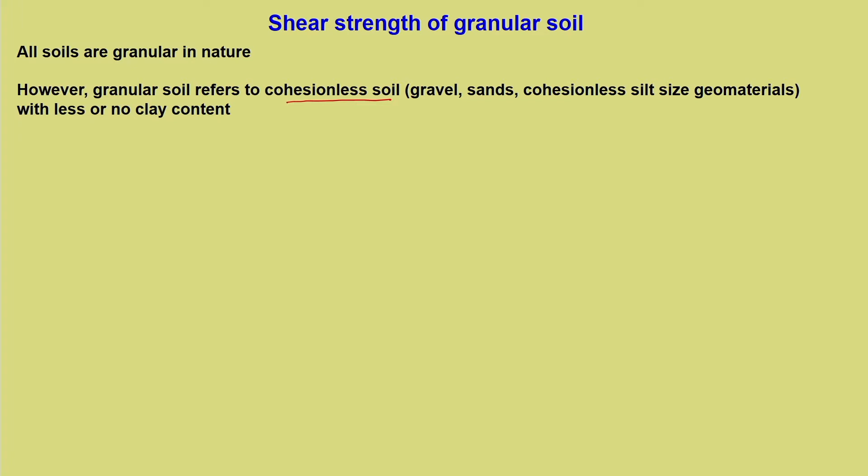This will include gravel, sands or cohesionless silt size geomaterials, because this will include materials like fly ash, which are essentially silt size, and hence can be considered as geomaterials with less or no clay content. So here, when we say granular soil, it essentially refers to cohesionless soil.

It does not possess true cohesion, meaning the absence of natural cementation. But some granular soils like sand can exhibit what is known as apparent cohesion, which is condition specific, depending upon the water content or the degree of saturation of that particular sand.

You might have noticed that it is fairly comfortable walking on beaches which are partially wet. Why is this so? This is mainly because of the capillary action or the negative pore water pressure, which we call soil suction, present in partially saturated sands. Hence, it imparts more strength and you are able to walk comfortably on beaches.

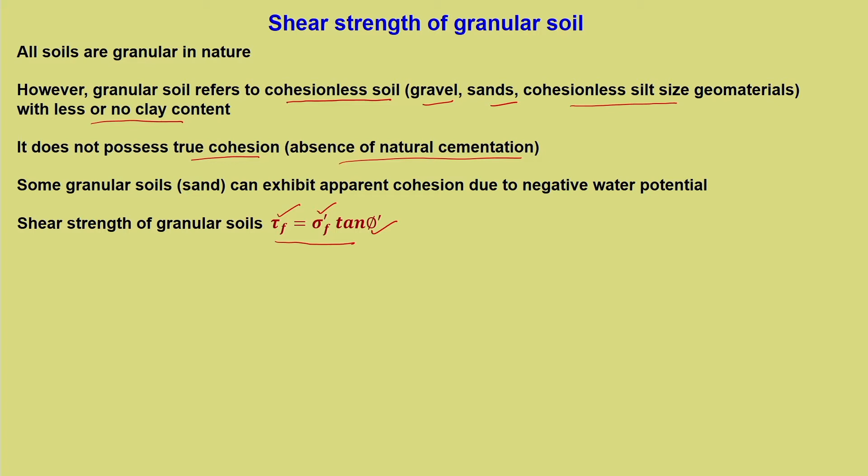Phi dash is mostly determined by either direct shear test or drained triaxial test, because the permeability of granular soil is fairly high.

The initial state of the granular soil, whether loose, medium or dense, affects the shear strength. Now, what is this initial state? It depends upon the initial unit weight or packing or compaction state, and is generally defined by the term relative density, which all of you know.

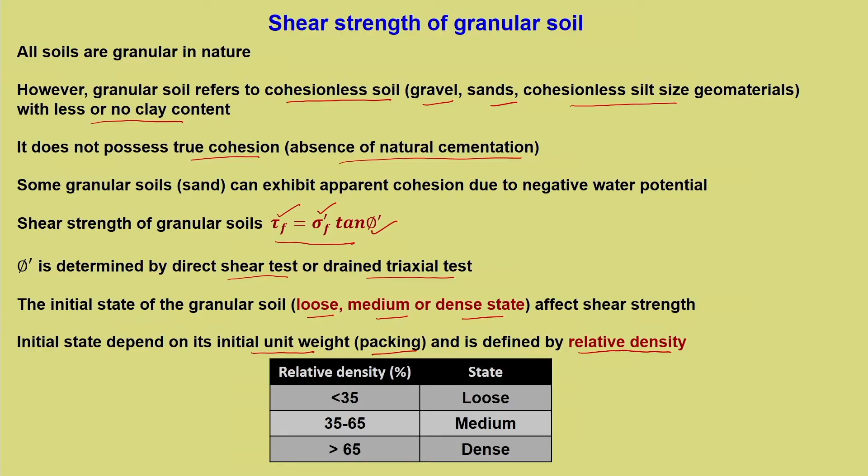As a guideline, a relative density less than 35% is considered loose, 35 to 65% is medium, and greater than 65% is considered dense. So we are basically discussing three states of the granular soil, defined in terms of loose, medium and dense. This relative density takes care of the kind of initial packing of the granular materials.

Now we will see the typical stress strain response of sand, a granular material, from a typical direct shear test, wherein the x axis is represented by lateral shear displacement and the y axis is given by nominal shear stress tau. Now, we know in direct shear test it is very difficult to quantify the strain and the true stresses acting on the failure plane, or on a given plane.

The reason is the area of direct shear keeps changing during the test, because there is a horizontal movement of the upper box. So it is very difficult to state the true stresses acting, hence the term nominal shear stress tau. And instead of strain, we express this in terms of lateral shear displacement, or relative displacement.

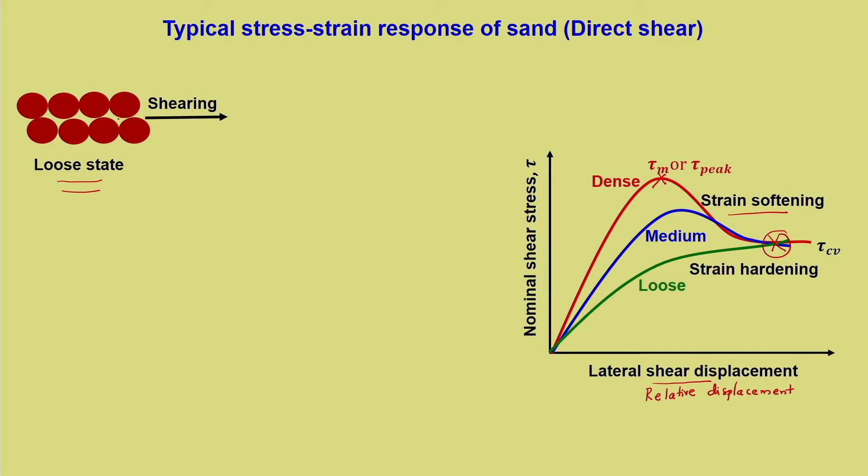Now, this is what a loose state represents. Soil particles are loose, and when this loose state is subjected to shearing, that is horizontal movement, particles can move horizontally, and when it moves horizontally in this direction, the particles move downwards, as you can see by the arrow. All these particles go and fill into the voids because it is a loose state, and hence it moves downwards. This is a very important aspect which we need to understand. When a loose state is sheared, particles move horizontally and downwards, and hence it undergoes compression during shearing. This is an important point which we need to keep in mind. A loose state, when sheared, undergoes compression. This is a very important observation.

In the case of the dense state, particles are already in these voids, so there is a good interlocking of materials. Now, let us say that this dense state is sheared. Shearing means it has to move horizontally. What is the possibility of such a movement? If it has to move horizontally, it has to undergo some movement. So the dense state of granular soil is sheared, and shearing is restrained by interlocking because it is already occupying the spaces, it is densely packed. So there is good interlocking. Now, during shearing, if it has to move horizontally, then it has to move in the upward direction. The particles have to move upward. So this is different from the loose soil.

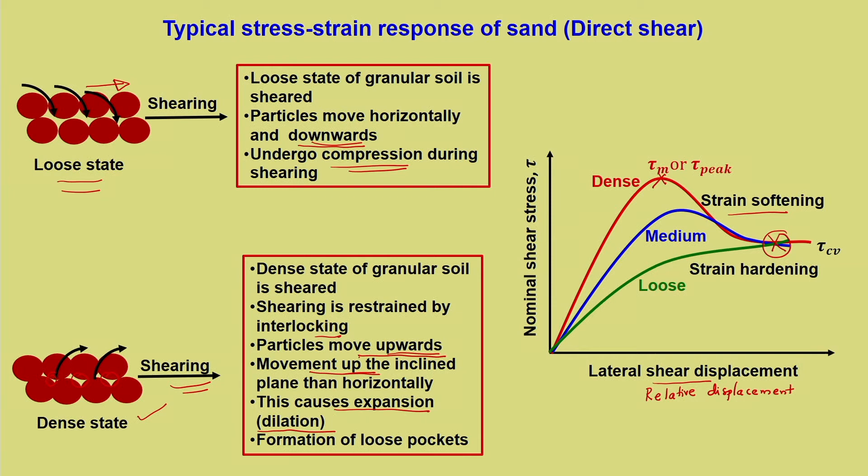So movement is up the inclined plane rather than horizontally. If it has to make any sort of horizontal movement, the movement of the particle is more like moving up an inclined plane, so it has to do additional work. Now this causes expansion, or what is known as dilation. Please remember this carefully: when a dense state of soil is sheared, to execute shear it has to expand, or dilate, and during dilation there are formations of loose pockets, because a densely packed material, when it expands, leads to the formation of loose pockets. So this is the difference in behavior when a loose and dense state of the material is sheared.

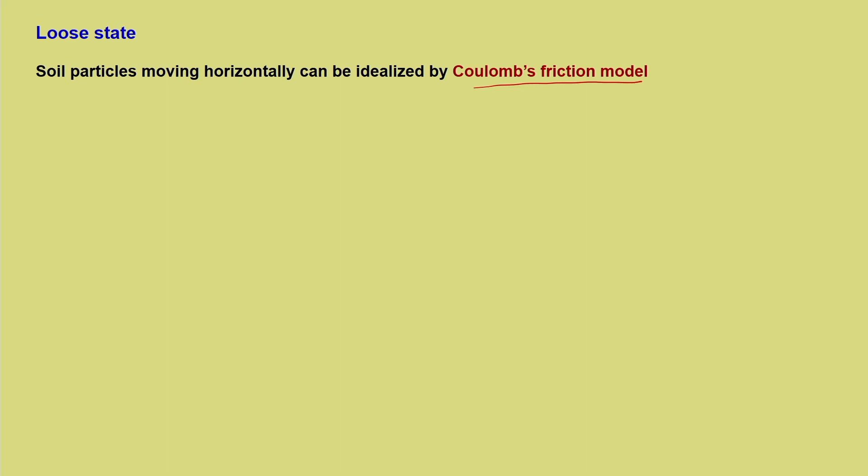Now let us see a loose state in detail. Soil particles moving horizontally can be idealized easily by Coulomb's friction model, as we have learnt, because here it is a loose state, there is an intergranular contact where tau f and sigma dash f are acting. This is the predefined failure plane along which it acts. We know Coulomb's friction model is applicable only when there is a failure plane attached to it. So we can easily write tau f is equal to sigma dash f tan phi dash, no confusion in that.

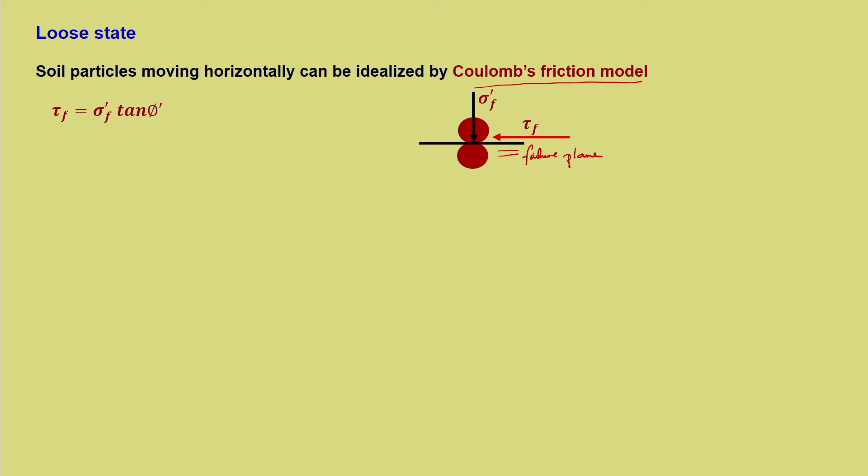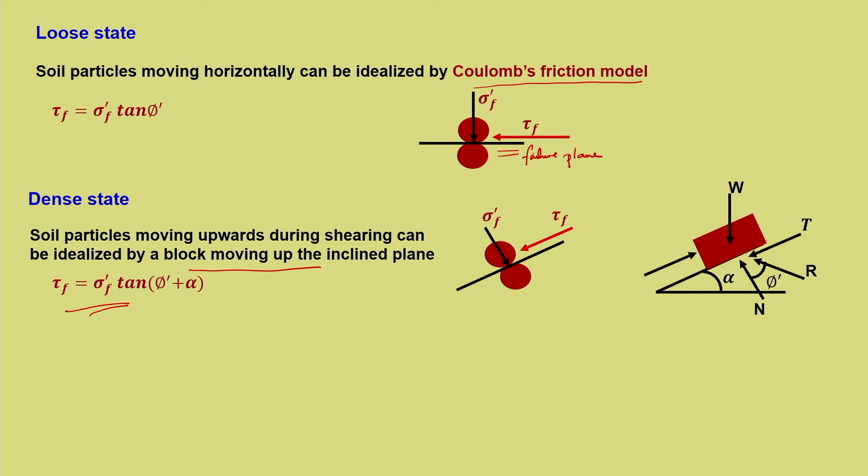Now this is a very prominent friction problem that we have learned, and we can conveniently write tau f is equal to sigma dash f tan of phi dash plus alpha, because it is movement up the inclined plane. Now if it is down the inclined plane, this will be minus. In soils, both will be there; there can be upward and downward movements for particles, but generally in the case of dense soil, for explaining the shear behavior, we normally refer to dilation or expansion. The expansion or dilation in the dense state increases the friction angle component, from phi dash to phi dash plus alpha. This additional component alpha is called the dilation angle, very important.

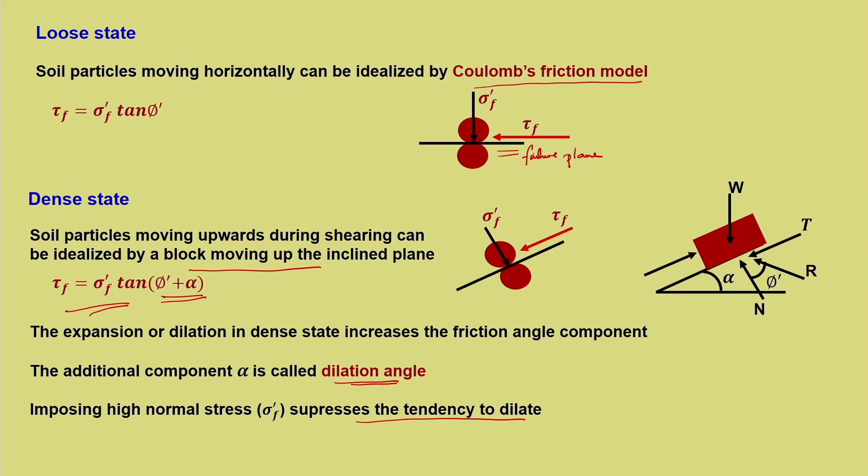Now, imposing high normal stress, if the normal stress is more, this particle will not be able to traverse in the upward direction. You are restricting movement from the upward. There is a confinement which will not allow particles to move upwards freely, meaning the amount of dilation is a function of the normal stress. Here, normal stress is more like a confining stress from above. So imposing high normal stress suppresses the tendency to dilate, because of which the dilation angle decreases.

Now we will see this again. There are some facts: dense and medium compacted granular soil exhibit peak shear strength specifically at low confining stress, because the dilation has to happen. Then only the dilative behavior, expansion followed by peak behavior, is going to happen. So this peak marked here is a function of this dilation behavior.

So peak behavior occurs at low strain or relative displacement due to particle interlocking and dilation, and it is mostly a stiff response, meaning particles are tightly held. So it is a stiff material. Now the peak happens at a low strain.

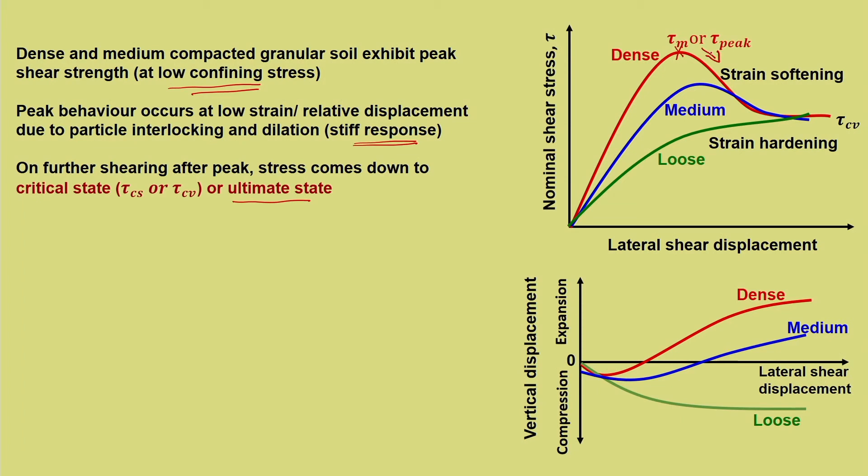So it keeps on increasing, reaches a peak, but this peak behavior is exhibited at relatively lower strain, not at higher strain, or it is expressed in terms of relative displacement, and this happens because of dilation or particle interlocking. On further shearing after the peak, stress comes down to critical state, tau Cs or tau Cv, also known as the ultimate state. We have already told this particular movement downwards—not movement, the stress comes down.

So this post-peak reduction is called strain softening behavior. Now critical state, constant shear strength, occurs at large strain, generally 10 to 20% relative displacement. This is defined differently in different codes, but generally 10 to 20% strain level, you can expect critical shear strength.

Loose state does not exhibit peak and directly approaches tau Cv, as can be seen here. The progressive increase in stress after yielding, post yielding, is called strain hardening behavior, which is denoted here.

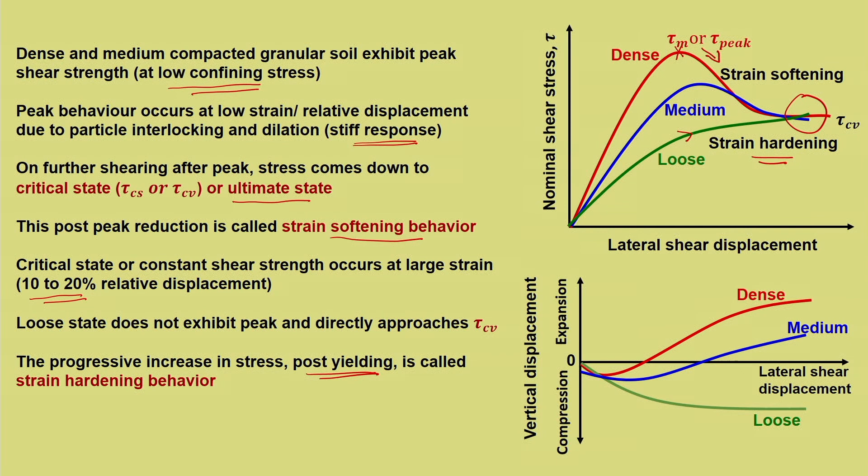Now that is about the stress-strain behavior we have discussed. Let us see what happens to the volume, because we do not generally discuss undrained or no-volume condition. For granular soil, there will be volume change, and how it happens for dense and loose state we will see. The volume of dense sand decreases initially and then dilates.

So here on the y-axis it is vertical displacement, and on the x-axis it is lateral shear displacement or relative displacement. For dense soil, we can see an initial decrement in vertical displacement, which is nothing but compression. Below is compression, no volume change, and expansion. For dense soil, there is initial compression followed by an increase in volume, which we call dilation. By the time it dilates, it reaches the peak behavior.

Volume reaches constant at high strain or relative displacement. By the time it reaches the critical state, the volume change also remains constant—there is no more volume change. It reaches a constant volume at high strain condition, maybe close to critical state.

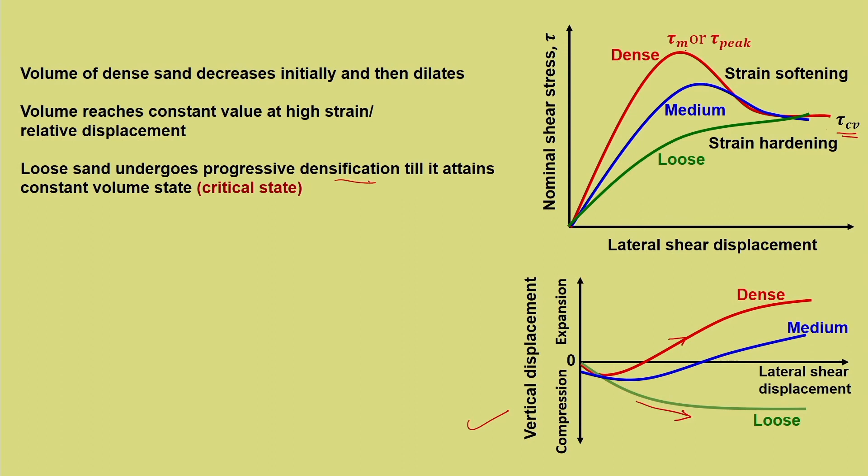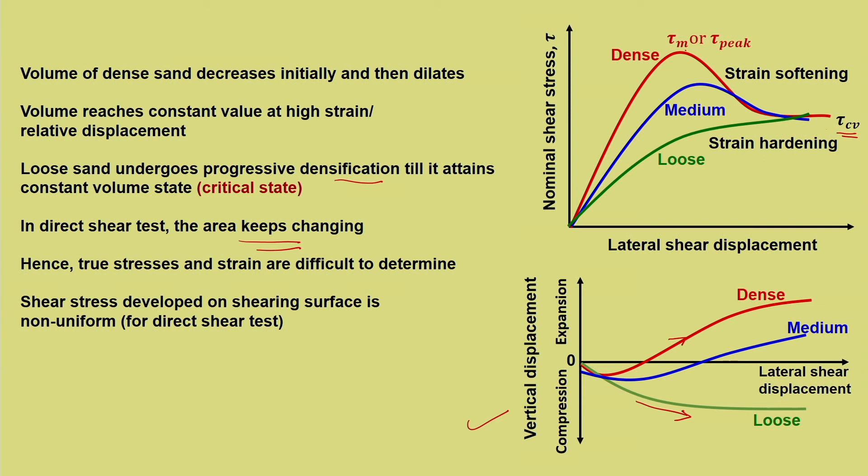Loose sand undergoes progressive compression, or progressive densification, till it attains critical constant volume or critical state volume, also at a high strain. In direct shear test, the area keeps changing, hence true stresses and strain are difficult to determine, which I have already explained. Shear stress developed on the shearing surface is non-uniform for direct shear test, because at the edges and towards the center it will not be the same.

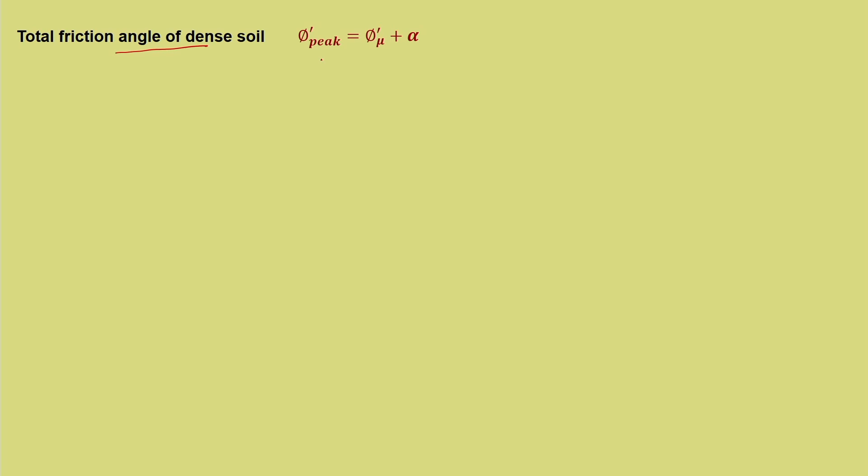Now for dense soil, the total friction angle can be written as phi dash peak equals phi dash mu plus alpha. We have already discussed what alpha is. The peculiarity about alpha is it increases with an increase in relative density. We have seen that depending on the relative density, the dilation keeps changing, so that will be reflected in alpha. So alpha becomes a function of initial state or denseness—if it is more dense, alpha will be more.

Now phi dash mu, this component is due to the friction mobilized at intergranular contact, that is the particle interaction, and this is somewhat a fundamental aspect of soil, phi dash mu, mobilized at the particulate contact. Alpha is the effect of interlocking and dilation, and hence a function of normal stress sigma dash f. So in this total friction angle of dense soil, phi dash mu is a function of particle interaction, and alpha is a function of dilation.

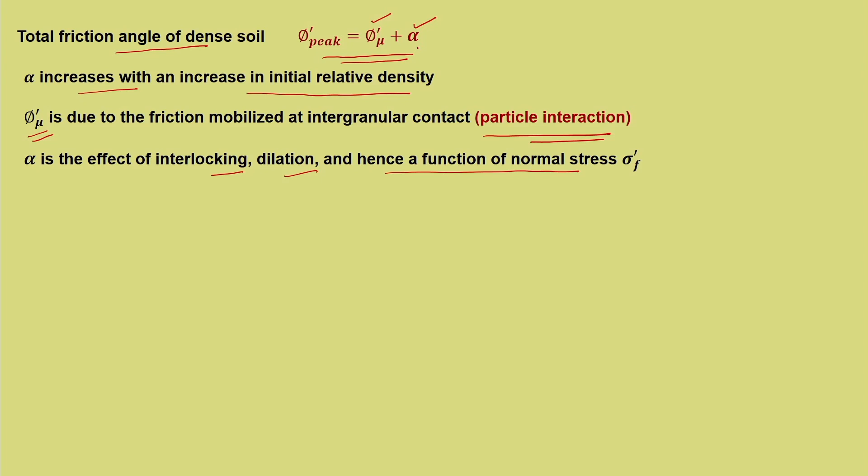Since alpha is a function of dilation, and we have seen alpha is a function of normal stress, if normal stress is more, it suppresses the dilation. So, we will see the effect of sigma dash f on alpha and Coulomb's failure line, how it changes the Coulomb's failure line. This is tau versus sigma, which we normally use to represent shear strength behavior.

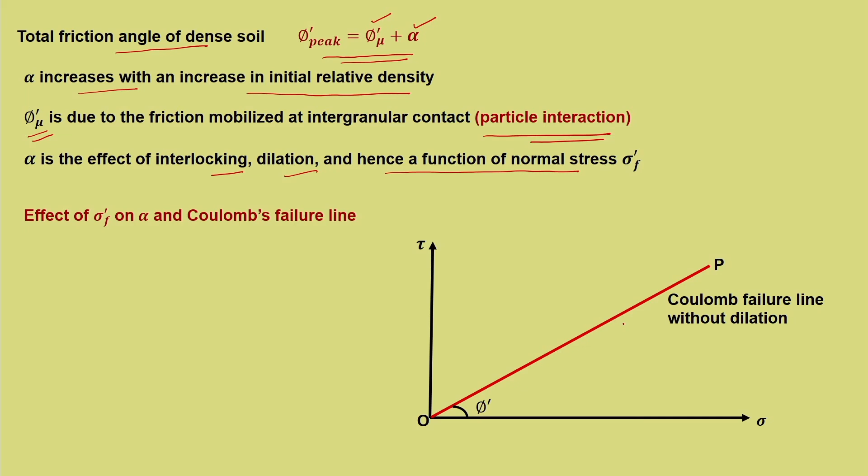For a cohesionless material, this is Coulomb's failure line without dilation. This is phi dash. It is very easy to understand - OP is the failure line represented by Coulomb's model.

As sigma dash f increases, the dilation is suppressed. So, corresponding to sigma 1 f, let us say it is a dense soil. It will have a dilation angle of alpha 1 corresponding to a tau peak 1. That is the first state.

Now, as the normal stress increases, for example at sigma 2 f, what is happening? We can see that the dilation angle gets reduced. This is the phi dash, denoted by phi dash mu. Now, what is above that?

Above phi dash is alpha 1, that is getting added. So, this is alpha 1 at lower normal stress - alpha 1 is more, but as sigma 2 f increases, alpha 2 is less than alpha 1, which is denoted by point r. This results in a curved Coulomb's failure line, which is due to dilation.

If you join through these points, you will get a curved line. Alpha reduces with sigma dash f and results in a curved failure line, represented by OQRS.

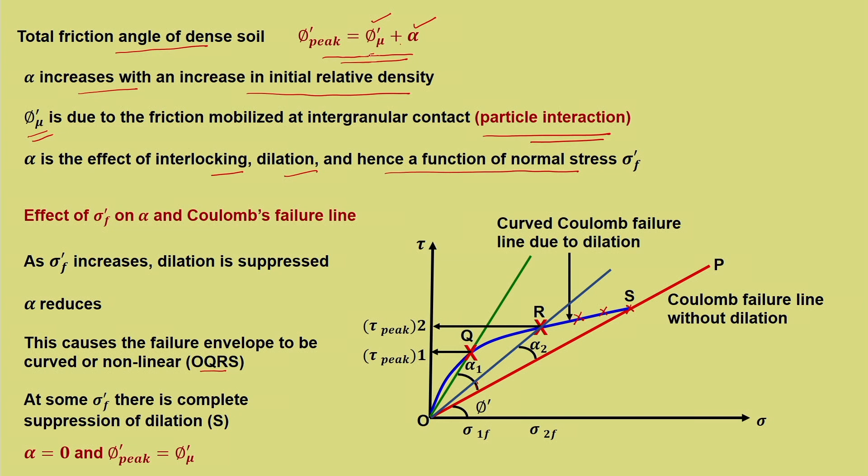At this particular point, alpha is 0, and phi dash peak is equal to phi dash mu according to this equation. So, alpha is 0, and phi dash peak is equal to phi dash mu.

So, dilation angle alpha is the measure of change in volumetric strain with respect to change in shear strain, and phi dash mu can be termed as friction angle corresponding to critical state or constant volume. We have tried to understand what is phi dash mu.

Now, what is the significance of phi dash mu? Because this is the fundamental aspect or the fundamental friction behavior of the soil. Whatever be the state, there will be some kind of friction angle, which is the critical state friction angle. We will be able to appreciate this better when we finish the 4th module on critical state.

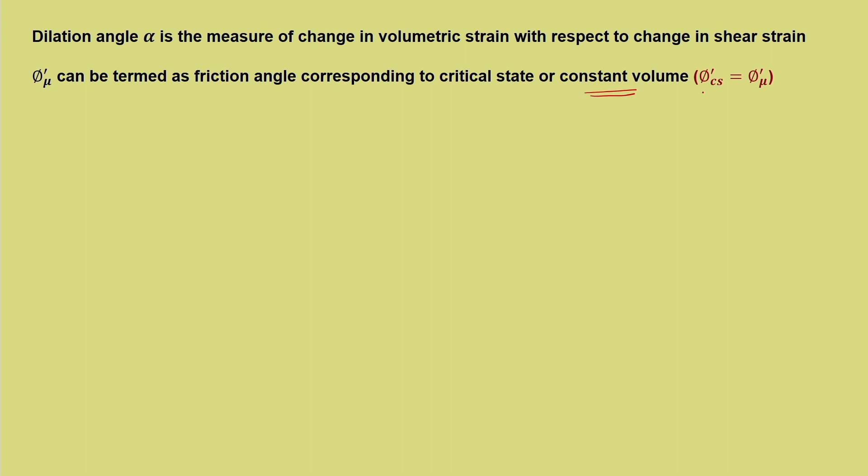For the time being, let us understand that there is always some value which remains and which can be mobilized by a soil - that is a critical state, and phi dash mu is termed as the friction angle corresponding to critical state or constant volume. So, phi dash Cs is equal to phi dash mu.

Now, whether dilation happens or not, that will determine alpha, or the additional component that gets added to the soil. So, shear strength corresponding to peak behavior is called peak shear strength, tau peak, expressed as tau peak equals sigma dash f tan of phi dash plus alpha.

Strength corresponding to critical state is called critical state shear strength, tau Cs, given by tau Cs equals sigma dash f tan phi dash Cs. Remember this is critical state friction angle, and phi dash peak is equal to phi dash Cs plus alpha. Earlier we wrote in terms of phi dash mu for our initial understanding, but where does it boil down to? It boils down to phi dash Cs.

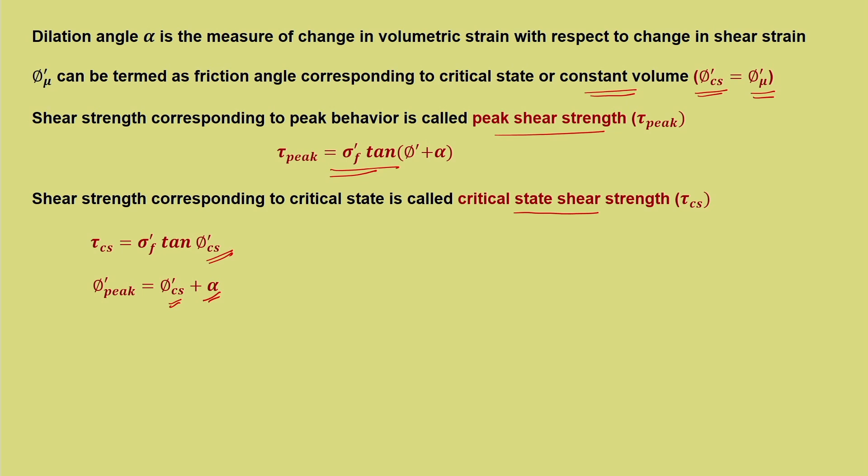So, Coulomb's failure line without dilation - here this friction angle, which is mobilized by soil at any state, is phi dash Cs. On top of it we get alpha, which gives us phi dash peak.

Alpha generally ranges between 0 and 15 degrees. Phi dash Cs is the effective friction angle at critical state shear strength, a fundamental soil parameter. This aspect of fundamental soil behavior can be better appreciated when we discuss it in module 4.

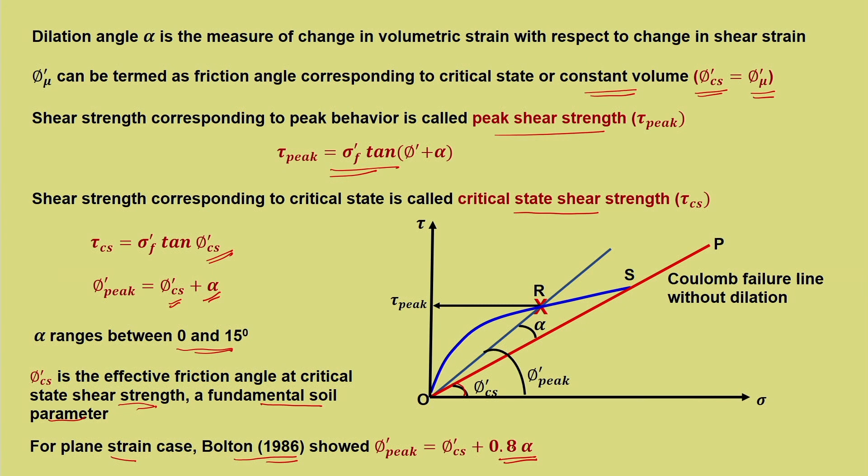For a plane strain case, Bolton in 1986 showed that phi dash peak is equal to phi dash Cs plus 0.8 of alpha. Here we have taken plus alpha, but there is not much difference - specifically for plane strain condition, Bolton explained how the dilation angle contributes to phi dash peak.

So, that is all for now. We will see in the next lecture the remaining portions of shear strength of granular soil, wherein 3 aspects we will discuss: one is the critical void ratio, then we will discuss Taylor's model, and there is something called intrinsic friction. So, these 3 aspects will be covered in the next lecture. Thank you.